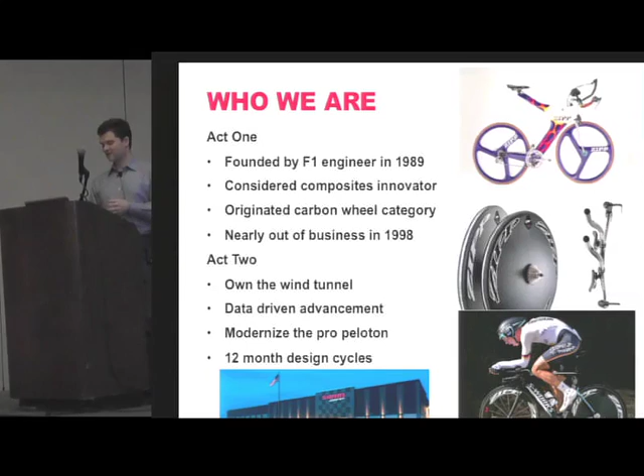We wanted to get into the pro peloton because the professionals weren't using this stuff. It's a very historically oriented sport. There's a lot of old timers around, and the old timers teach the newcomers, and a lot of the old ways are perpetuated. So as a result, a lot of the modern technology just was not making it into the professional ranks.

And then we also wanted to shoot for 12-month or faster design cycles. Now, in the process, we sort of accidentally on purpose completely changed our industry and our market. You guys have, I'm sure, all seen the sort of customer response curve. It's your early adopters on the far left, your early and late majority, and your laggards.

One of the things we found ourselves with in 1999, we were a 16-employee company. We had a $1,000 wheel set, essentially one wheel set. And what conventional wisdom was, well, you're too expensive, and you need to come down market, right? You need to catch the early and late majority by lowering the price and broadening the consumer base.

But instead, we decided to go laterally while pushing the price point up and getting really specific with features for different users. So we identified what a triathlete wanted, what a track cyclist wanted, what a time trial racer wanted, all the different aspects or types of cycling. We became very targeted, and as we did that, we put the price higher and higher each year.

2004, we found ourselves with 70 employees, $1,600 wheel set, but we had 5 options at that price range. By 2012, we were 250 employees. Our average wheel set cost, or really our entry point, is $2,700 for a set of bicycle wheels.

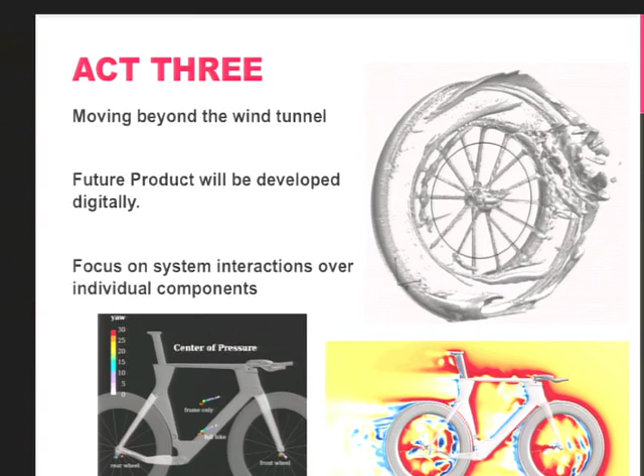I think that's become a real calling card of our company: okay, yeah, now there's 10 companies who want to talk to you about wheels, but I want to talk to you about wheel interactions. I want to talk about handling, stability. I want to talk to you about things the other guys aren't talking about, and I can talk to you about it at an incredibly high level because we're leading with our development technologies.

So I'm up here today because I was recommended by Steve Legensky of Intelligent Light. How did we get here? Sort of a fortuity, one of my favorite words, that back in October through December of 2008, we had a project called Columbus underway at the wind tunnel.

We were basically investing about 200 hours of wind tunnel time looking at the future of bicycle wheels and how they interacted on different frames. Wind tunnel work is something we're very well versed in. I probably have 1,200 plus hours in the wind tunnel personally, and amongst my team, we probably have 10,000 hours. When you consider that it's like watching paint dry or like watching a computer process, it's terribly boring. But you do learn a lot.

And we're in there banging our heads against the wall because we're just not improving. 100 hours rolls past, and we're 1% better. My customers, they're not going to trade in last year's wheels for this year's wheels for 1%. They're just not. That works when you're Boeing, and 1% over the life of an airplane is a whole lot of fuel, but that doesn't work in the consumer space.

January 2009, Matt Godo and Steve Legensky present a paper at the AIAA conference, where Matt, trying to show off what their software could do and really make a point from their perspective, decided to model bicycle wheels. He happened to own our wheels and ride them. And I think, correct me if I'm wrong Steve, I think we had actually made a marketing claim that he wanted to disprove. Negative drag.

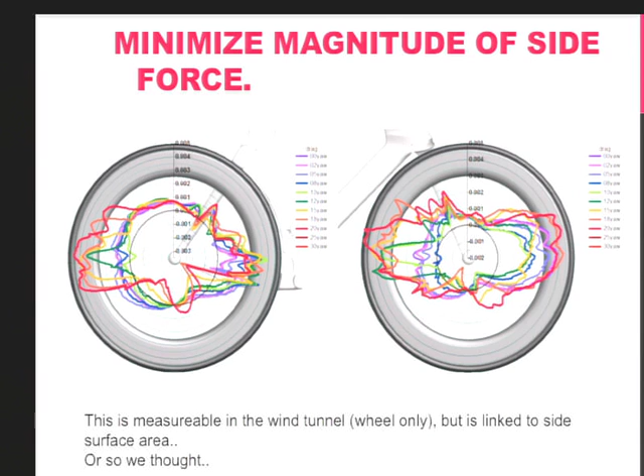So instead of just having a side force data point in a wind tunnel graph, let's actually work at minimizing that value. Well, let's look at steering torque. If the front wheel of a bicycle is influenced by the wind, and the faster I make a wheel, the more lift it creates, the harder it is to ride. I think our industry had just accepted that as a fact and tried to live with it.

And in Matt's paper, we saw the future. This quite literally was the future — if we could find that force distribution around the rim, we could model the center of pressure accurately, and then we could play with parameters to see how we move it, and then move it to where we want to move it.

Now, somewhere in here, we have to start sort of writing the science handbook, because there are questions like, well, where do you want to move it to? This is pretty groundbreaking stuff. There's no handbook on what's good and what's bad, and so a lot of other technologies start to come in.

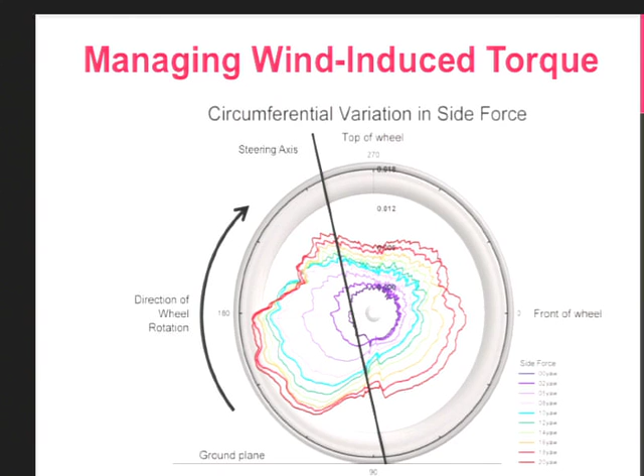Rapid prototyping technologies were advancing, and this was quite exciting — to prove this point, we printed our first 3D printed metal wheels that were rideable. We could actually model it for one center of pressure, print that wheel, build it up, and send a guy out on it to ride it, and then have him come back and tell us what it felt like. This was really groundbreaking stuff.

And then we saw this. It was sort of this massive revelation that, okay, well, not only are we modeling things like center of pressure and drag distribution, but they move.

As a wind tunnel guy, with an auto racing background and composites background, and coming from auto racing, every wind tunnel works the same way. Has anyone ever been to a wind tunnel? We have quite a few. Okay, so one of the first things you do when you get to the wind tunnel is you talk with the folks that work there about how you're going to collect your data, what frequency, for how long, to get your data point.

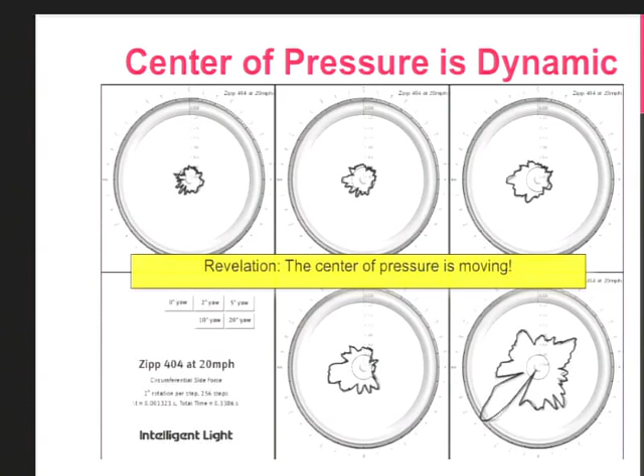The smack in the face here was this realization that by our own language, we were closing our eyes to 90% of the data. We were saying data point, but it's data range. And then the question became, well, if it moves, how do we make it move less? And what's good? Let's define what's bad, then let's define how to make it better. And then we started looking at, well, why is it moving? And we realized we have a shedding problem.

You can't quite see it here in the way it prints up there, but this was really groundbreaking stuff, 3 years ago for us. And so we started coming up with the realization that what the rider referred to as buffeting in the wind is essentially the way the wheel wants to destabilize underneath you. It has a bit of a vibration to it. Riders call that buffeting — that's a shedding frequency. In hindsight, this is totally obvious. At the time, we've been doing this for a whole career and nobody thought of it.

And then we started looking at, okay, well now we have a parameter. If we can push that frequency higher and reduce the amplitude, then the buffeting thing goes away.

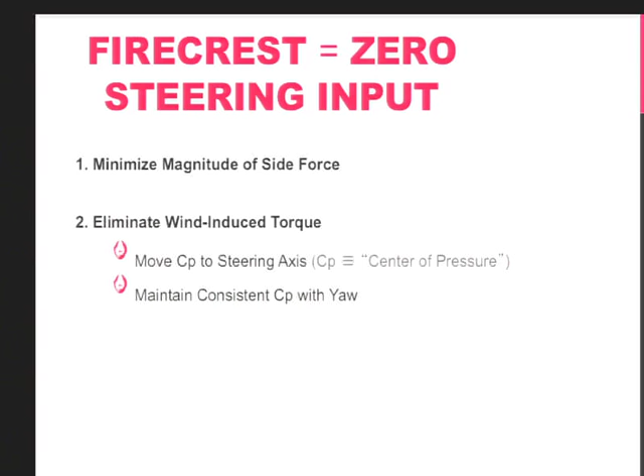And so from this, we developed the technology we call Firecrest, which is a zero steering input — that's how we sell it to our customers. And there's 3 legs to the stool: minimize the side force, eliminate the wind-induced torque by moving the center of pressure, and reduce the effects of the vortex shedding.

So minimizing the side force, that's a direct function of the side surface area. In the old thinking, we said, well, we can't change that — a wheel so deep has so much surface area. Deeper wheels get faster, but the deeper you want to ride, the harder it is to control that wheel. That's how it works. So we didn't think we could change it.

Well, the wind-induced torque wasn't measurable at the time in any of the wind tunnels that did bicycle testing, so nobody was even thinking about it. And then the effects of the vortex shedding, we weren't measuring either. It was there all along, but we weren't measuring it.

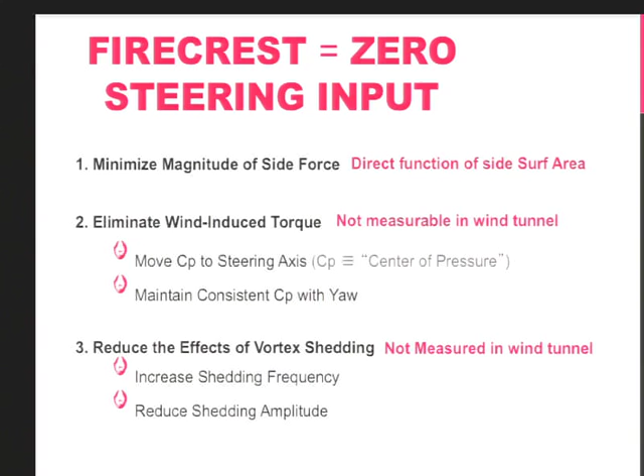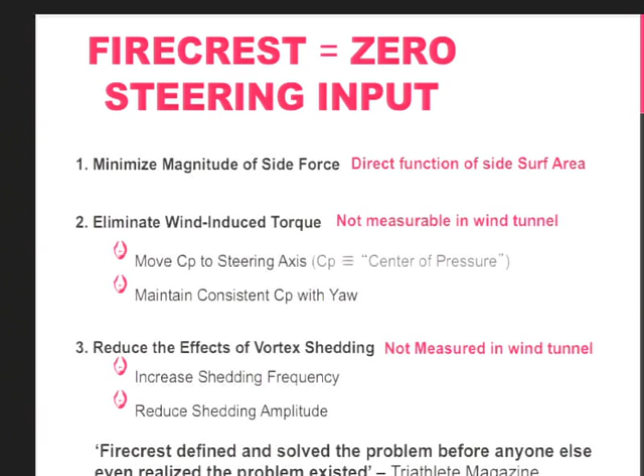And so in developing this product and telling this story, the editor of Triathlete Magazine made a really beautiful point when he said Firecrest defined and solved the problem before anyone else even realized the problem existed. That was the sort of massive leap in the technology here. We came to market with the problem statement and a solution for it, and the other guys were standing completely flat-footed, unaware that the problem was even a problem, or that you could even do anything about it.

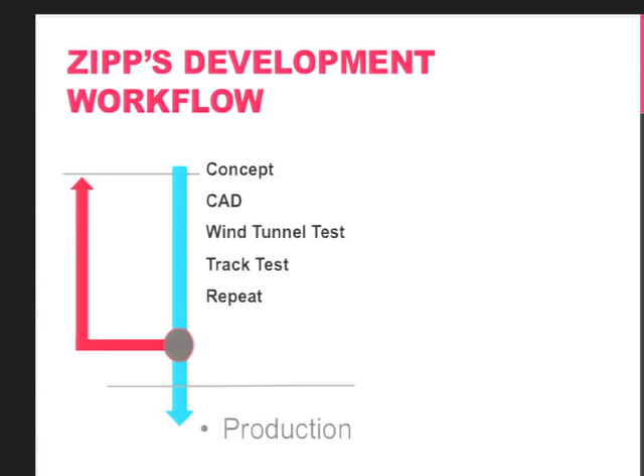And so we went back and said, we've got to push this in our workflow. Here's how it had been forever — we've got to change. And so the thought was, how do we put CFD in to where we can go CAD to CFD, and take what was typically $150,000 to $200,000 a year at the wind tunnel, plus in-tunnel time, probably another $250,000 in prototypes. Well, those prototypes — if I take 100 prototypes a year, those are my 100 best ideas. They're probably culled down from maybe 200 ideas. But how do we get from 200 to 100? Well, intuition — that's the sort of hand-waving magic that goes on in the background.

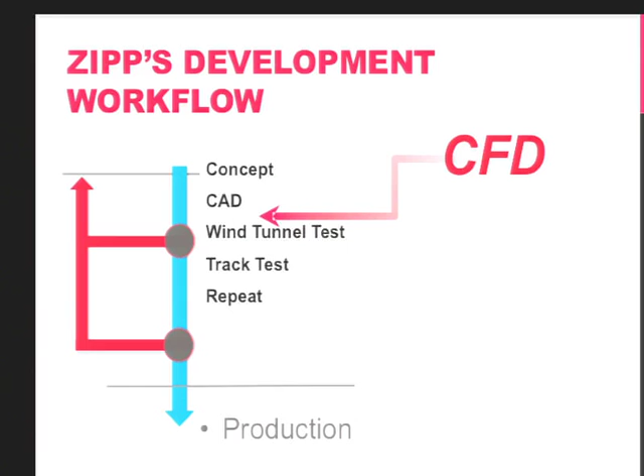Oh, this feels like it'll work — and some of them you just let be darts at the wall. Well, that's crazy, let's try that. But you throw a lot of stuff out for no reason other than you can't test it. So the thought here was, okay, how do I get 1,000 ideas down to my 100? And then, of course, how do we rapidly get that into production and make a whole lot of money out of it?

So that's the Firecrest story, as we've told it over and over. It did tremendous things for our business — we added over 100 manufacturing jobs, a massive increase in sales, and we just completely changed the market. The interesting story behind this story is CFD didn't create or lead to Firecrest at all. Firecrest was a shape that Michael had come up with beforehand.

The interesting thing about this story was the CFD really pointed out to us that what we thought was just a pretty fast wheel in the wind tunnel wasn't just fast, but solved the steering torque thing. It solved the frequency shedding problem. So it changed the way we thought about the wheel. And it was so good, the CFD told us that it was so much better than we even thought it was.

That we at the last minute chose to completely retool a project we were about to launch. So we retooled about $250,000 in tooling in about 8 weeks to make our product launch, because it was so good we had no choice. So I think the irony of the story is we eventually, maybe a year or two later, would have launched a Firecrest project in a world without CFD, but we would have launched it as just another really fast wheel.

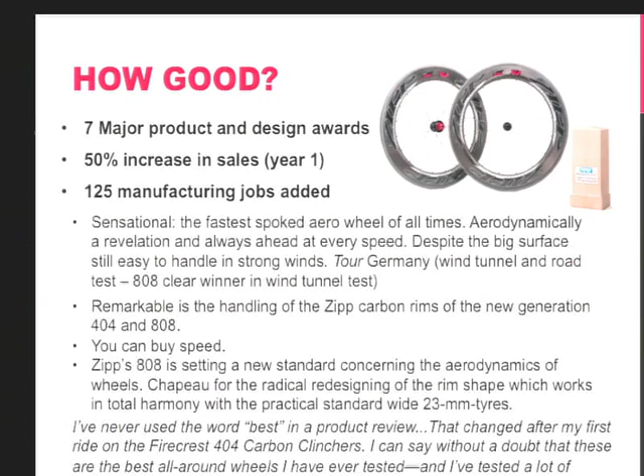Now, one of the things that's so great about this is, had we gone to market with Firecrest and it was just another fast wheel, I think these quotes would be different, right? A lot of what these people feel and think and believe and know when they ride that wheel, they know and feel and think and believe because we told them that that's what it was doing. And we showed them those really awesome, beautiful pictures and movies that really cemented in their minds that that's what they were feeling.

So it really is a game changer for all of us. For us internally, it caused some real inward looking. Wow, there's a whole lot of data that we're not looking at or not thinking about.

From the perspective of our industry, this product has changed everything. I mean, everything. Every single major wheel competitor in the market today has to talk about stability and handling because they have to. You look back 3 years, not a word. No one talked about it.

So the real problem was, okay, how do we repeat that? From those of you on the design side of things know, okay, wow, when you're in the game of constantly having to one-up yourself, how do you one-up the greatest thing you've ever done?

And so that's what brings us to the project that we are presenting today. Intel helped with funding, and it was actually executed by the Intelligent Light Advanced Research Group. And the goal was, okay, how do we take the very advanced level, PhD level stuff that Matt Godo was doing and actually kind of weaponize that into something that a company like ours can actually use at our scale. And so Intelligent Light helped by bringing in themselves, obviously, CD Adapco, our systems, Intel to help on the hardware side.

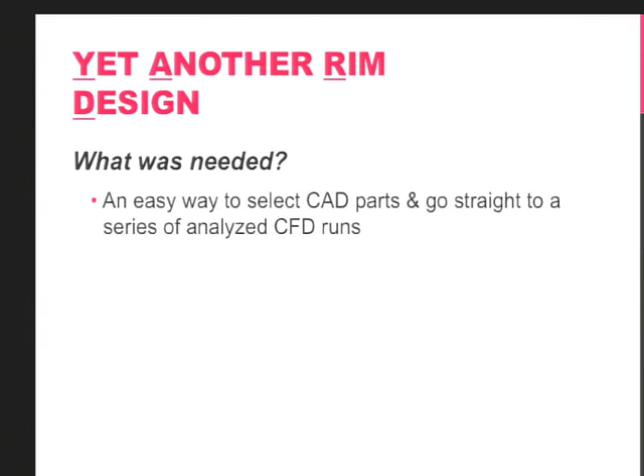So what we developed is called YARD, yet another RIM design. The goal was, how do we throw CAD parts in, use Java scripting to essentially create the runs within the STAR-CCM+ environment, and then FVX scripts for FieldView to post-process and spit back to us what we're interested in, so we can throw away all the other stuff.

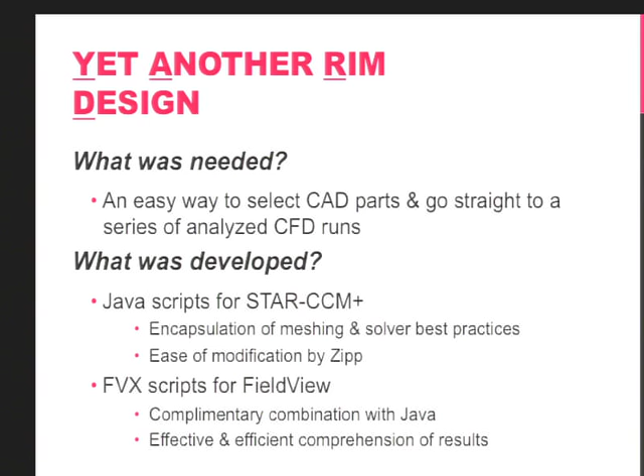From a best practices perspective, you can read it, but basically we throw our CAD models in, hit run, and it does all the other stuff. This is where I think the power of HPC for companies my size becomes really amazing. I create the CAD, we put it in a queue, the software looks to the queue, when it runs the YARD, it grabs the next rim, hub, spokes, whatever we're running—we could put a fork in there, a bicycle, and it just starts going.

Everybody the first time they see it wants to watch it, and then they realize it's going to take two hours to mesh, and eventually it gets pretty boring. But it builds the environment, builds the model, and then churns away on meshing. Then it runs itself, then it saves itself. At the end of a RANS solution, we can convert to DES or unsteady RANS and continue to run that.

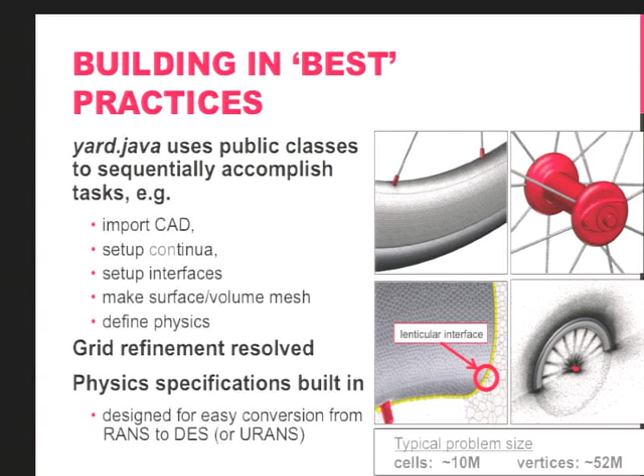So what the team created for us is this sort of amazing couple of scripts—really tiny little pieces of code. I say tiny because I didn't have to write them. It looks at a parts manifest, runs the Java, throws it in, runs through, and all I had to do was create the CAD part.

So you can imagine I'm really loving this, because this is the beginning of how we democratize CFD within our company. The way it's been up until now is we've got a couple of aero guys from auto racing and myself who come up with the ideas. I have 25 engineers on staff, a lot of them production manufacturing engineers, composites engineers—we have folks from everywhere. Well, I want them to come up with ideas too. But they're busy with other things, so in the old world they're not sitting in meetings talking about new ideas to try.

But what these guys can do today that is so cool is they can sit at their desk, open a SolidWorks environment—we have a start part—draw a simple rim cross-section, revolve it, throw it in the queue, and their stuff will be run right alongside that of the experts.

One of the most exciting things about this: each idea gets run through a full yaw sweep, all the data is kicked out, and those guys can actually see the results of their idea. Sometimes those ideas are really terrible, and sometimes they've been impressively good. As those of you with aero backgrounds know, a lot of the most fascinating stuff is in the really bad ideas—the good stuff is sort of straightforward, but man, that was really bad in a really unexpected way. That's the stuff you want to go deeper in.